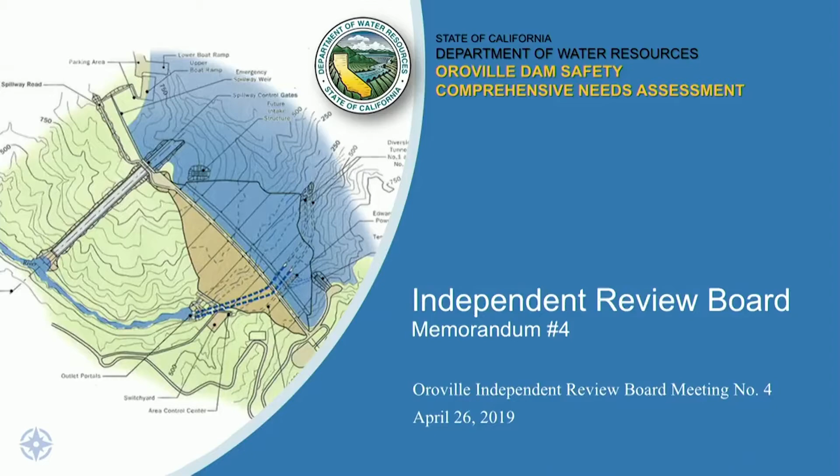Hi, I'm Dan Wade. I'm with the Independent Review Board for the Oroville Dam Safety Comprehensive Needs Assessment, and I'm here to report on meeting number 4, which was held March 14th and 15th of 2019. IRB Memorandum number 4. Just want to remind folks who the Independent Review Board members are for this study. We have Elizabeth or Betty Andrews with Environmental Science Associates, Dr. Lelio Mejia with Geosyntec Consultants, Bruce Muller, formerly with the U.S. Bureau of Reclamation and now an independent consultant, and he's the chair of the board, Paul Schweiger with Gannett Fleming, and myself, Daniel Wade with the San Francisco Public Utilities Commission.

Past Recommendations. So what I'd like to start out with is just to review the status of our comment log from the past 3 meetings. As a reminder, we have status descriptions in the comment log that have been defined to help folks follow the status of each comment that's been made. We have these categories, including under consideration, where the project team is considering the recommendation but hasn't necessarily committed to if or how the recommendation will be addressed. We have a planned status label where the Independent Review Board has accepted the project team's response and an appropriate action is planned, and we know that that's coming.

We have a status label called In Progress where the Independent Review Board does see evidence of the planned actions underway. Then we have a closed status where the Independent Review Board has reviewed and confirmed that the project team's planned action has been completed and adequately addressed. And then we do have a not adopted category where the project team didn't adopt the recommendation and has provided an explanation. And in at least one case, we do have a recommendation that's been superseded. Comment Log. Looking at the last 3 meetings, you can see that in the first meeting there were quite a few recommendations, 22 recommendations, and you can see the status of each recommendation there listed in the column.

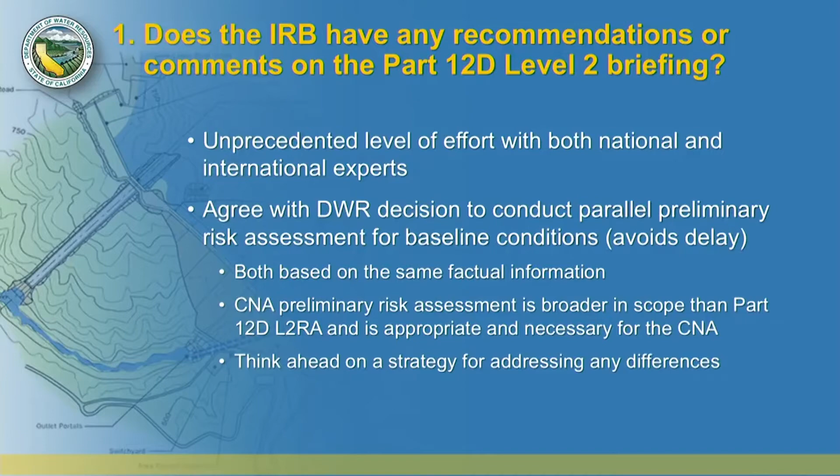We do caution, however, that it's important to think ahead on a strategy for addressing any differences that may be an outcome from doing these parallel analyses, and I'll talk more about that in just a moment. We think the risk is low, and we do feel strongly that the parallel analysis should go forward, but we do want to just strongly urge the team to think about how to address differences if they come along.

And so the second question that was asked by DWR was, does the independent review board have any recommendations or comments on the needs, the objectives, the considerations, and the constraints that were set out in the project from the beginning? And those have been kind of a work in progress, and the IRB was very pleased to see that at this meeting we saw very clear and consistent need statements and project objectives, and we really felt like the team heard our comments from previous meetings and responded very proactively, and the IRB was very pleased to see that. We do see now that there are very clear distinctions between project objectives and project considerations.

And we agree with using the DWR asset management framework as the basis for comparing alternatives. We think that will allow all stakeholders, both internal and external, to be able to view the information and the outcomes of this study in a consistent manner within the asset management framework that DWR has employed.

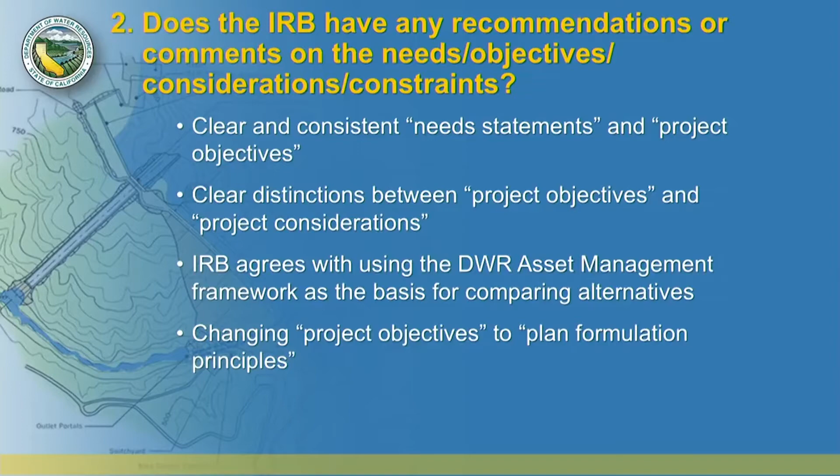We did make a recommendation, and the team has adopted it, to change the term project objectives to plan formulation principles, and that was to really avoid confusion with task objectives as opposed to project objectives. And so there was some terminology discussion in the meeting, and the team has adopted those.

And so the third question from DWR was, does the Independent Review Board have any recommendations or comments on the evaluation criteria and process? And our response to that is essentially that the DWR asset management framework is considered appropriate for evaluating measures and alternatives within the bounds of the comprehensive needs assessment.

We fully recognize that there are other stakeholder issues that need to be considered before final decisions are made on implementation of alternative plans, but that's a decision process that we understand will be employed by DWR leadership after the CNA is complete. And so we fully endorse the framework that's being used for the CNA process and feel that it's very appropriate.

The Independent Review Board confirmed the process for formulating and screening the measures and alternatives. We're very glad to see a robust process presented, and we endorse that process and look forward to seeing the results that come out of it.

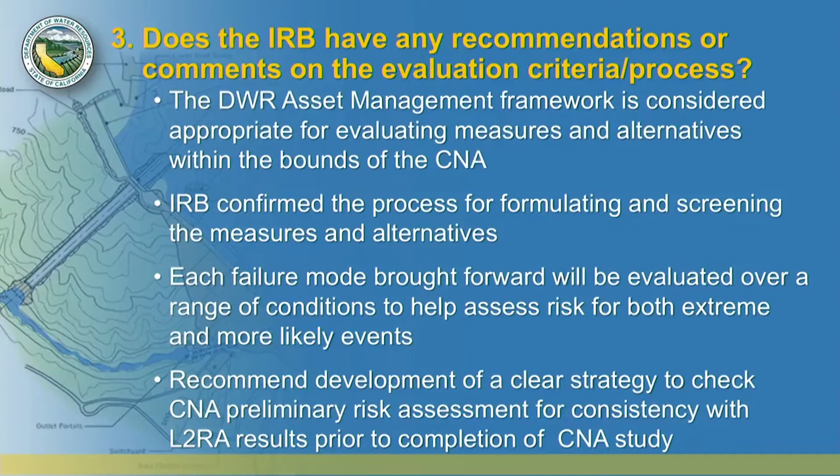And we do recommend development of a clear strategy to check the Comprehensive Needs Assessment Preliminary Risk Assessment for consistency with a Level 2 risk assessment results prior to completion of the Comprehensive Needs Assessment study. And so this is one of our 4 recommendations, that a clear strategy be developed in case there's any differences that need to be reconciled at the end, and how will the CNA be adjusted as appropriate if there's any differences.

The fourth question was, does the Independent Review Board have any recommendations or comments on the Task 4 update? We feel that DWR has appropriately documented a basis for considering the Hyatt power plant to be available for releases if needed for lowering the reservoir.

The task team has made very good and substantial progress in developing the necessary information for the analyses that need to be performed. We were very glad to see the progress that's been made, and we look forward to seeing the progress of the other task teams as well at the future meetings.

The Independent Review Board encourages DWR to begin developing the documentation for the background sections of the report. It's going to be a monumental effort to put all of the task reports together as well as the final report together. And to the extent that task teams can start doing some of the background work now, putting the data together, summarizing sections, and really setting themselves up for success towards the end, we would encourage that to happen.

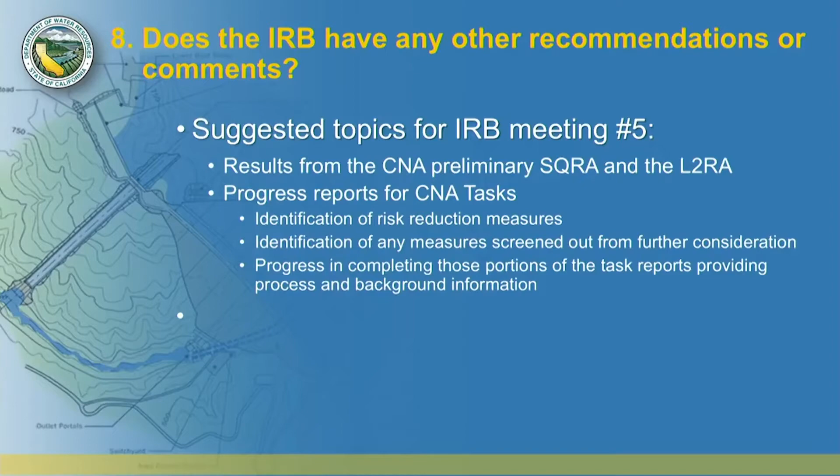And then we look forward to seeing progress draft reports for the various tasks, including identification of risk reduction measures, identification of measures screened out from further consideration, progress in completing those portions of the task reports, providing process and background information. And so, again, the earlier task teams can work on that, I think they'll be setting themselves up for success at the end of the project.

And just as a concluding comment, the IRB was very pleased to see the progress that the team is making, and we feel that the team is well positioned to have a successful project with the work that's been done to date. And so we look forward to seeing the work that's upcoming in August and in the future meetings. Thank you.

Good morning. My name's Les Harder. I'm with HDR Engineering, representing the Department of Water Resources. I'm here today to give you an update on the Level 2 risk analysis that's being conducted for the department on Oroville Dam.

Presentation outline. Generally, the outline I plan to do on the presentation is give you a background on the FERC Part 12D 5-year review process by an independent consultant, introduce you to the thought of a potential failure mode analysis, talk about the Congressional mandate for an independent Level 2 risk analysis, and then give you an overview of the ongoing Level 2 risk analyses that are being conducted. Talk about the organization, leadership, participants, the general approach and methods, and the status and accomplishments to date, and talk a little bit about a revised schedule that we have.

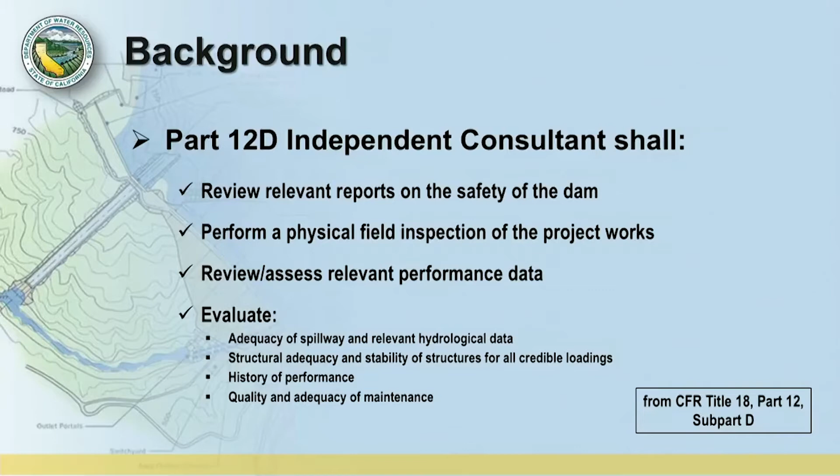So a bit more on background. The Part 12D independent consultant every 5 years shall do these things: review relevant reports on the safety of the dam, perform a physical field inspection of the project works, shall review and assess relevant performance data, and evaluate the following things: the adequacy of spillway and relevant hydrologic data, structural adequacy and stability of structures for all credible loadings, history of performance, and quality and adequacy of maintenance. This is directly out of the Code of Federal Regulations.

The independent consultant shall issue a report, and the report has to have these things. It has to have monitoring information and data, including drawings showing the locations of the instrumentation. Analyses by the independent consultant, analyses of safety of the project works, maintenance and methods of operation, implications of changes in information or analyses since the prior report, adequacy of existing monitoring instruments, periodic observation programs, and other methods of monitoring project works.

The report shall make recommendations, including recommendations on the following: any corrective measures needed for the structures, maintenance, surveillance, or methods of operation, a suggested reasonable time to carry out each of these corrective measures, and any new or additional monitoring instruments, periodic observations, or other methods of monitoring. Again, this is straight out of the Code of Federal Regulations.

So, potential failure mode analyses. This has been required by FERC since December of 2002. It's to be conducted jointly by the owner, the independent consultant, and FERC staff. And a few definitions: a potential failure mode, PFM, is a chain of events leading to unsatisfactory performance of the dam or a portion thereof.

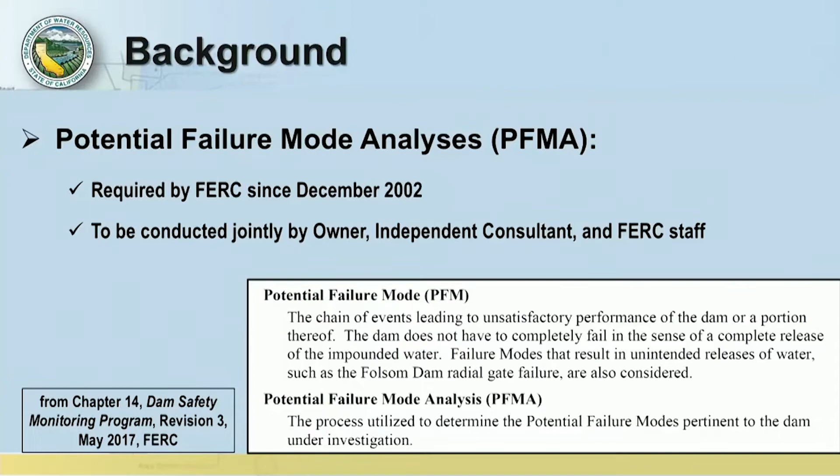The dam does not have to completely fail in the sense of a complete release of the impounded water. Failure modes that result in unintended releases of water, such as the Folsom Dam radial gate failure, are also considered. It's basically a scenario of chain of events that might lead to something that's unacceptable. Potential failure mode analysis, PFMA. This is the process utilized to determine the potential failure modes pertinent to the dam under investigation. And these definitions come from FERC documents, basically Chapter 14.

So potential failure mode analyses, PFMA. The process is as follows. First of all, it's a consideration and development of PFMs. So this is an example of one. This example comes from the Best Practices in Dam and Levee Safety Risk Analysis, published by the United States Bureau of Reclamation and the Army Corps of Engineers. It involves an example of progression of internal erosion within a dam that leads to failure.

So you start with initiation, and part of that initiation is the reservoir is at or above a threshold level. It means it's high. Initiation starts, that means erosion begins. It continues, so under continuation you have an unfiltered or inadequately filtered exit for the water. It progresses, you have a continuous stable roof or sidewalls. More progression, you have a constriction or upstream zone fails to limit the flows through the erosion.

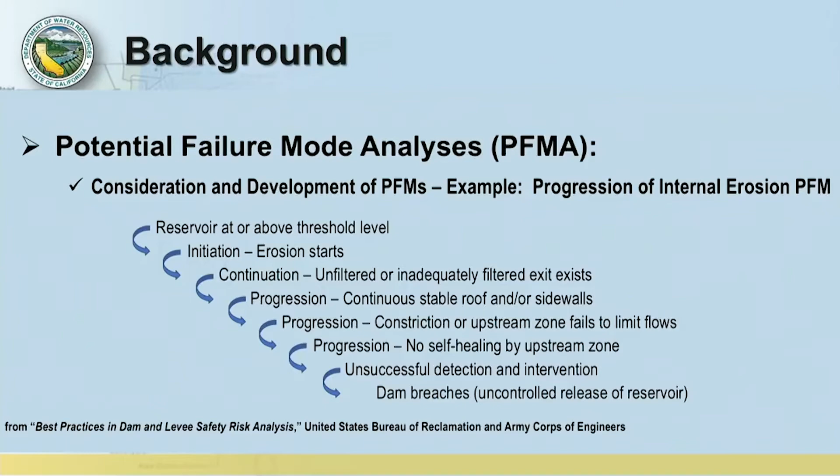More progression, you have no self-healing by upstream zone. And again, toward the end, you have unsuccessful detection and intervention by the parties on site. And finally, this leads to a dam breach and uncontrolled release of water. These are all steps in a scenario that leads to a failure of a dam by internal erosion.

So, along with developing the steps and development of the PFMs, you also identify more likely and less likely factors to affect that PFM. So a more likely factor could be something like the dam is subject to cracking because it has an irregular foundation. A less likely factor could be that the dam was designed to have a good filter in it. It makes it less likely to erode. We have categorization of the PFMs into one of four categories: categories 1, 2, 3, or 4. And this is the standard PFM process outlined by FERC.

The 4 categories are as follows. Category 1 is a highlighted potential failure mode. And these are potential failure modes that are of greatest significance considering the need for awareness, potential for occurrence, magnitude of consequence, and likelihood of adverse response. That's category 1. Category 2 is a potential failure mode considered to be possible, but is not highlighted. These are judged to be of lesser significance and likelihood.

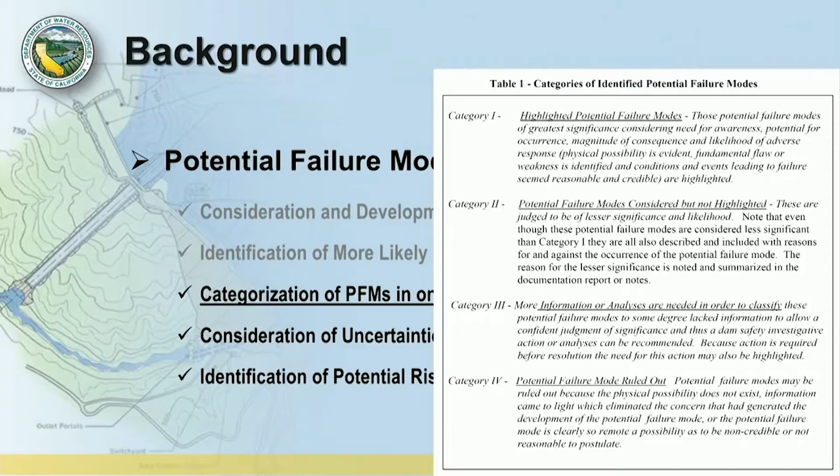Category 3 is basically there's insufficient information to rate or evaluate the PFM, and additional information or analyses are needed. In category 4, the potential failure mode is ruled out because it's believed to be physically impossible to occur. So that's the standard rating in the PFMA process as outlined by FERC guidance. Along with the PFMA development and categorization is the consideration of uncertainties and also identification of potential risk reduction factors. These are the steps in a standard PFMA process that's required every 5 years.

Congressional mandate. Now, last fall, in September 2018, the U.S. Congress had a conference report, and this language was part of that. And this highlighted language in yellow basically says, FERC shall require the licensee of Oroville Dam, that'd be the Department of Water Resources, to request the United States Society on Dams to nominate independent consultants to prepare a Level 2 risk analysis consistent with Commission's guidelines for use in conducting the next Part 12 safety review of Oroville Dam, currently scheduled for 2019. FERC shall ensure the independence of the nominated consultants from the licensee.

So this is a step above the standard PFMA process. So the 2 key things under this language in the legislation is that, first of all, it has to be done by independent consultants. And second of all, it has to be with a Level 2 risk analysis consistent with the Commission's guidelines.

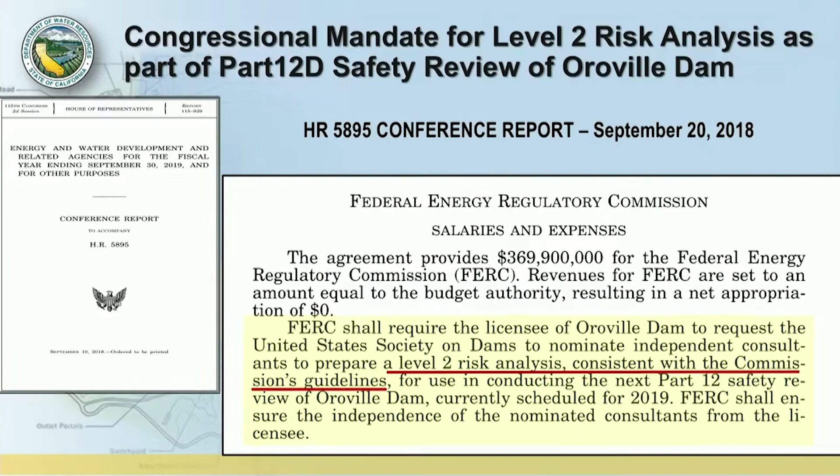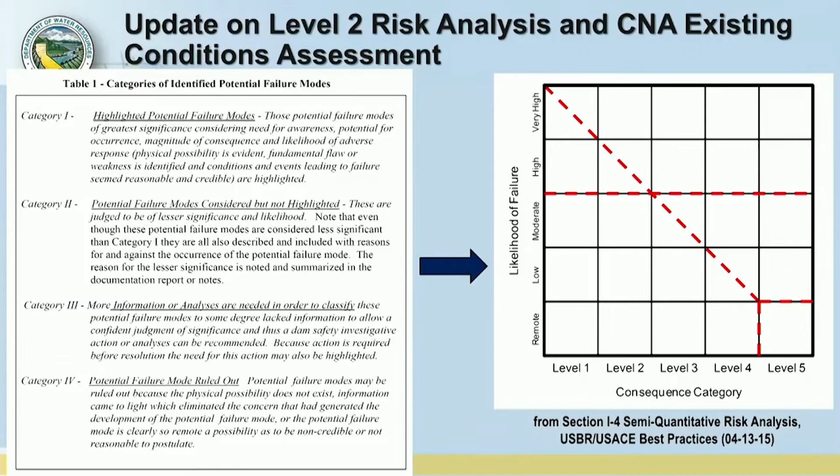Text, overview. So an overview of the ongoing Level 2 risk analysis. Text, FERC summary. FERC defines a Level 2 risk analysis as follows. It's periodic. Its purpose is identification of all PFMs and prioritization of additional studies needed. It is the lowest level of risk analysis for decisions. It does a prioritization of inventory, and it also employs tolerable risk in evaluating existing conditions. The type of risk is mainly incremental life safety, but also economic.

The typical level of effort is low to moderate, led by either a single individual, like an independent consultant, or a small team. The loadings are basic tools and methods to estimate annual exceedance probability. The consequences are estimated by simplified methods, the system response covers common PFMs using simplified approaches, and the uncertainties are evaluated on a qualitative basis.

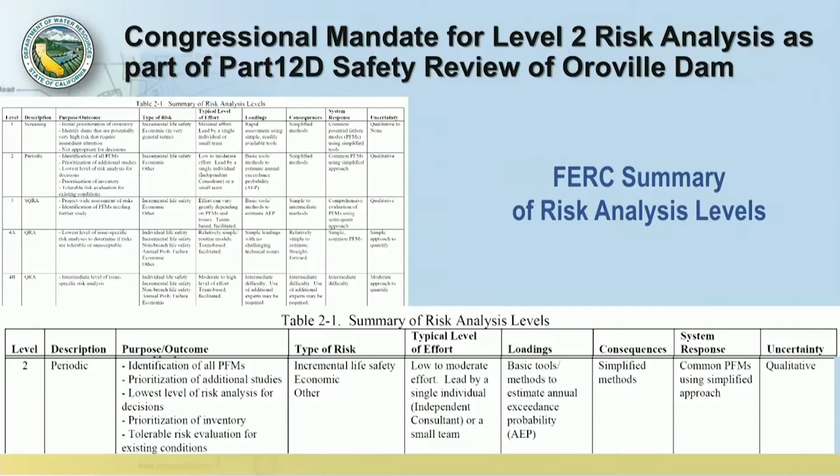Text, FERC draft. The guidance we're using is the best available from FERC. This is their guidance for a Level 2 risk analysis. It's still in draft form. This is the second draft, version 1.1, published in June 2018, and this is what the team is using to carry out the risk analyses.

Text, purposes and benefits. Purposes and benefits of a Level 2 risk analysis. Purposes include, first of all, it satisfies the congressional requirements for an independent Level 2 risk analysis. It also informs the FERC Part 12D periodic dam safety process, going beyond traditional PFMAs and category selection. Remember, the independent consultant still has to make their report, and they have to incorporate these results in it.

Benefits include, first of all, it's an organizational learning opportunity for a lot of people. This is the first type of analysis that FERC has applied nationwide, and it'd be a great learning opportunity for all participants, including DWR. It will inform the DWR Comprehensive Needs Assessment and the Asset Management Program. It is a demonstration of a Level 2 risk analysis on a major facility. And implementation of the independent forensic team's recommendation to expand the definition of failure, which is important.

Organization, leadership, and participants. First of all, the risk analysis team leads were nominated by USSD and hired through HDR's engineering contract with the Department of Water Resources. The independent team participants include experts from over 9 different consulting firms and agencies that include Black & Veatch, Gannett Fleming, Geosyntec, HDR, LCI, Schnabel. It also includes the U.S. Corps of Engineers Risk Management Center personnel, and we reached all the way across to Australia to the University of New South Wales. That's the independent team.

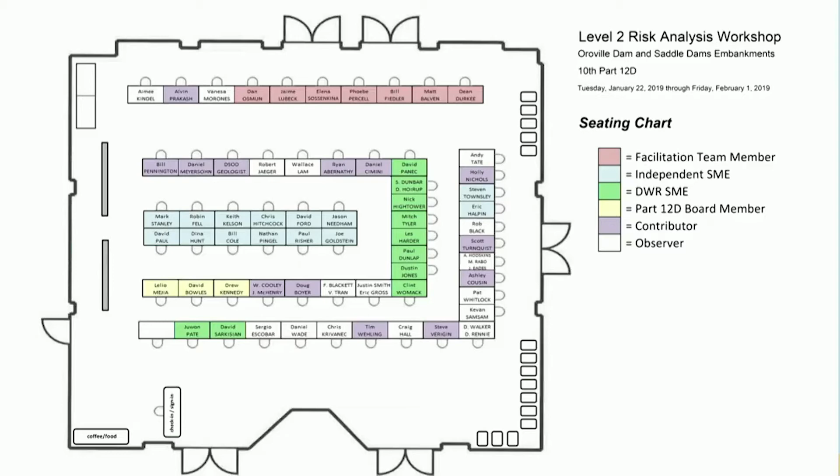The seating arrangement is generally to have the independent evaluators in the middle. That's the light blue boxes in the middle there, surrounded by DWR subject matter experts and other contributors. And then in the outer ring of seats, there are facilitation team members, observers, and other contributors. We meet either in HDR's office or in hotel conference rooms. Again, there's over 60 people here. It's costing DWR over $100,000 a day to do this, and there are a lot of days.

The process follows, again, the Level 2 guidance by FERC to take the existing information and develop an estimate of likelihood and consequences. The types of failures and consequences are divided into 4 groups, groups A, B, C, and D. The first thing is to think, does the event occur? Does the component fail? So if it fails, is there life loss? If there's life loss, that's group A. If the component fails, and again, the component could be a radial gate or part of the embankment, but there's no life loss, that's group B.

And then there are consequences even if everything works perfectly. For instance, in a very huge flood event, the reservoir in the dam will attenuate or reduce the flows discharged to the Feather River, but it doesn't stop them. And under some conditions, you still get flows that are overwhelming to downstream levees, even though the system works perfectly at Oroville, perfectly as intended, no component failure. In that case, you can still get life loss, that would be group C, or if there's other non-life loss consequences, that would be group D.

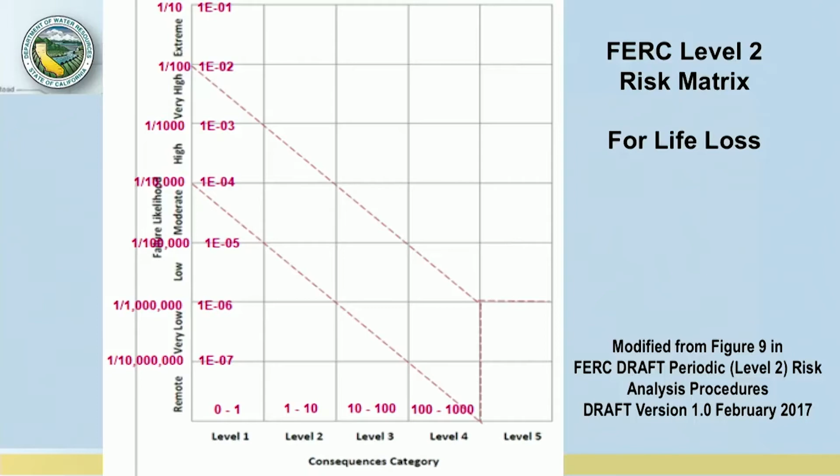The type of semi-quantitative risk matrix, this is an example from the FERC guidance document that has different levels of consequences. In this case, what's in red is potential life loss. So in level 1, it's 0 to 1. Level 2 is 1 to 10 lives lost, and so on. Level 3, level 4 is 100 to 1,000. And then on the vertical axis is the likelihood, the annual likelihood that that could occur. And 10 to the minus 7 there is 1 in 10 million.

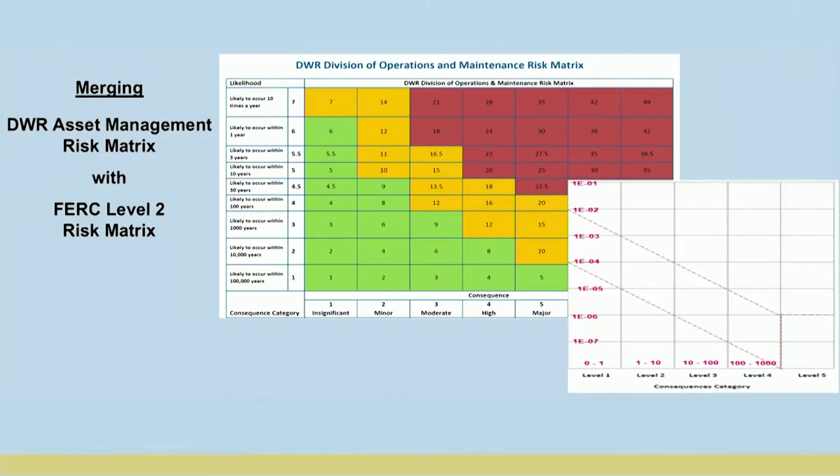The DWR's asset management risk matrix, that's the color-coded one in green, yellow, and red here. And that was developed generally for smaller components on the State Water Project. But for Oroville, the highest dam in the United States, we've had to extend the matrix just because the potential consequences are much greater than a typical component in the State Water Project. And so this is the risk matrix that is being used for level 2 for Oroville. It starts with a potential life loss from 0 all the way up to greater than 10,000 and considers likelihoods all from 1 in 100 annual probability to 1 in 10 million.

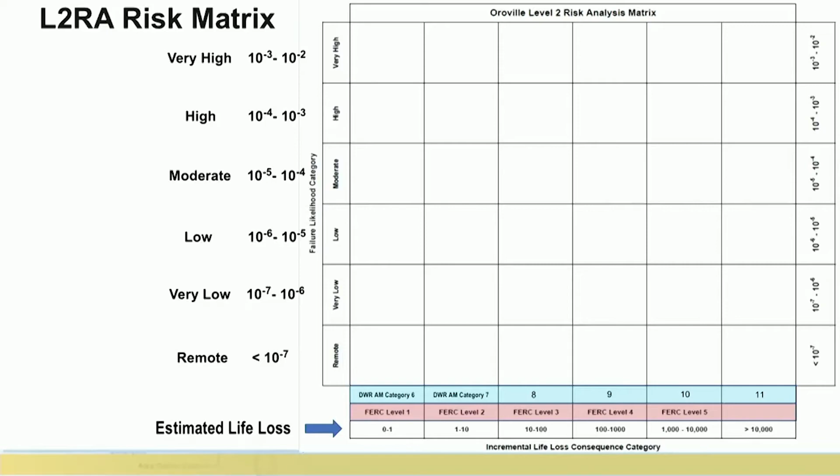Potential failure modes. Prior to the workshop, potential failure modes identified in previous PFMA workshops from 2009 to 2014 were combined and put in a table, and then the participants prior to the workshops were asked to brainstorm new potential failure modes. And these were all combined into a matrix identifying 171 pre-workshop potential failure modes that were considered.

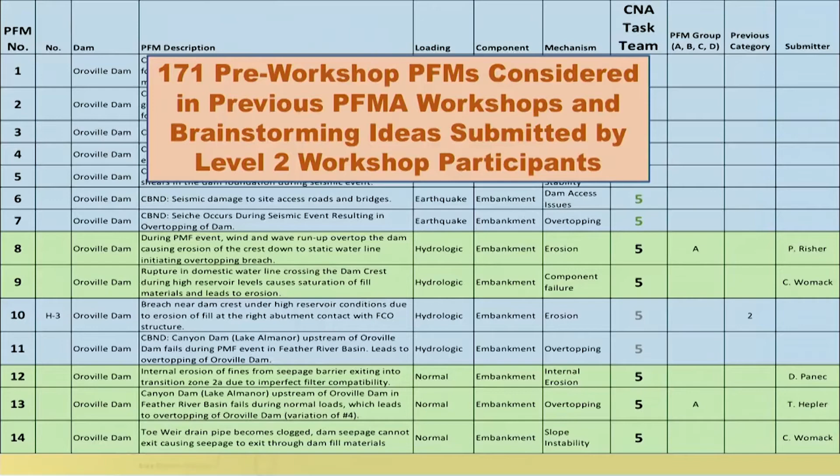These break down as 35 of them are associated with the embankments, 19 are associated with the emergency spillway, 64 are associated with the flood control outlet, the headworks, and the chute, and 53 are associated with the existing outlets. That's the Hyatt Power Plant, the Palermo Tunnel outlet, and the River Valve outlet. 171 total.

Some of these PFMs were previously considered but not developed because they were not thought to lead to a breach or uncontrolled release. We're now looking at other consequences, so many of these are being developed now. And then during the workshop sessions, additional PFMs are developed and added to this matrix.

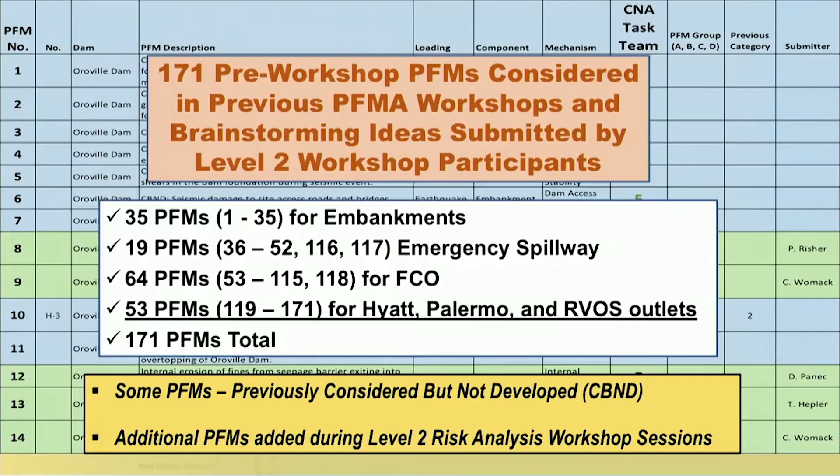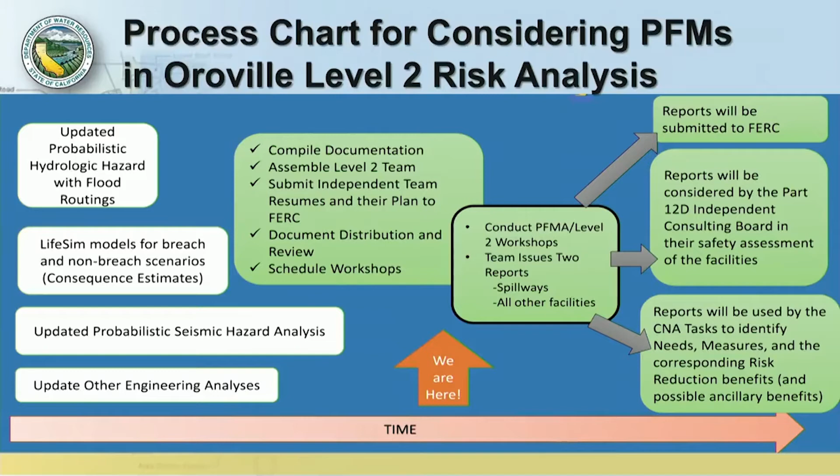Next, process chart. The basic process in the workshops is to present the available information relevant for the potential failure modes, do the steps in developing the potential failure modes, looking at likely and less likely factors, uncertainties, and then estimating the likelihood and the consequences. These will all go into reports that will be submitted to DWR and FERC later this year.

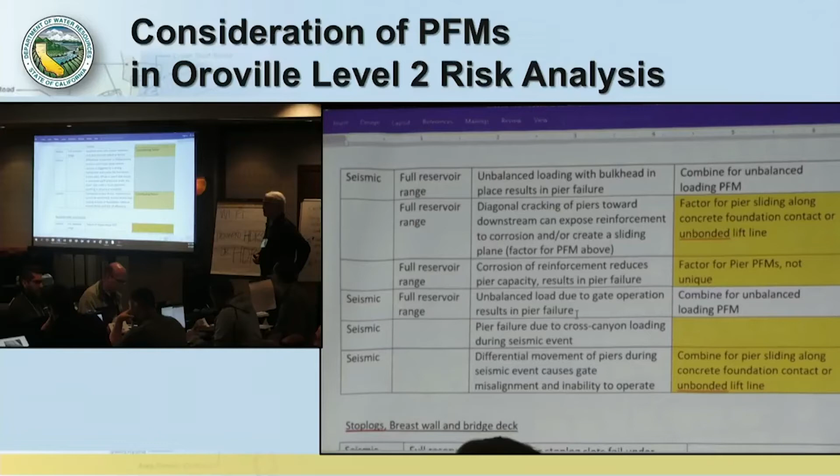Just a few snapshots here. This is during one of the workshops involving the flood control outlet headworks, and these were looking at seismic issues. These are different potential failure modes being discussed involving different components of the FCO. This is the beginning of developing the steps in a potential failure mode. Remember the sequential initiation, continuation, progression.

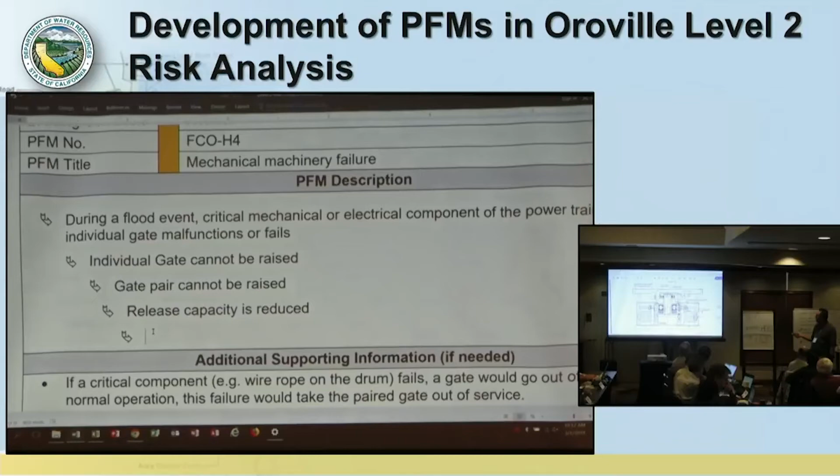This particular one has to do with a potential failure of the mechanical system that lifts the gates. And during this process, the components are reviewed in detail. In the lower photograph there, you can barely see an outline of part of the hoisting mechanism. And the likelihoods are then estimated and the consequences are done using guidance from the FERC.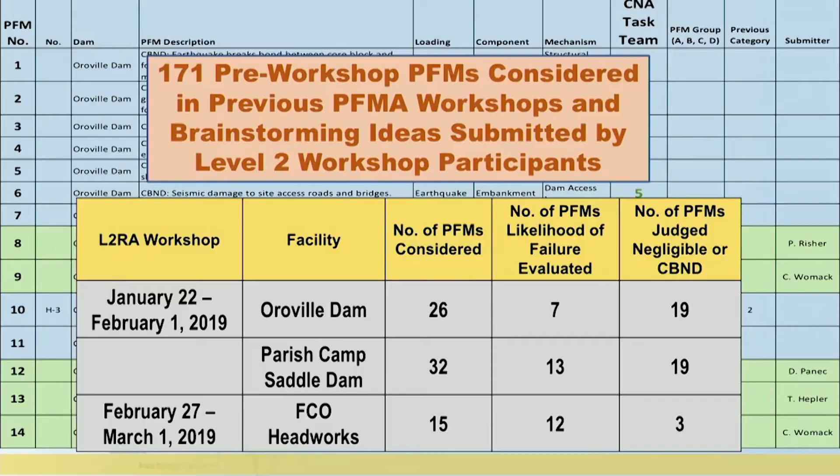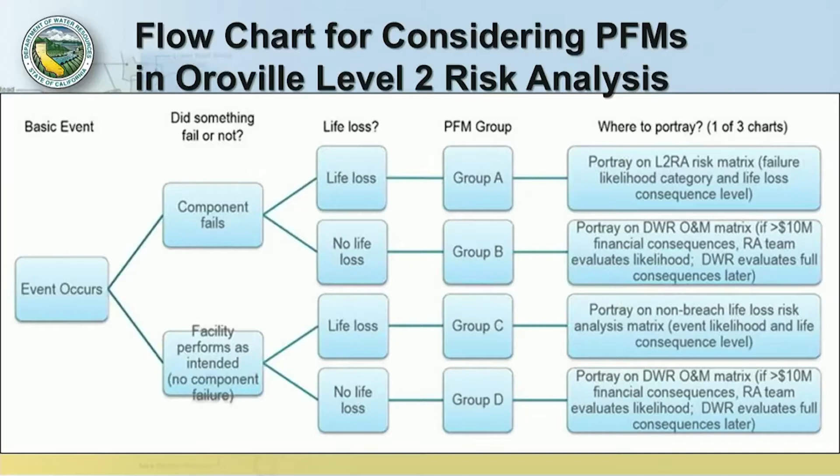And so far, we've done a lot of PFMs. Many of them were evaluated. Some were judged to be negligible and they were considered but not developed. So there's quite a few here just shown for the embankments and the FCO headworks. Again, so far we've concentrated on the potential for life loss, which is Group A. And in subsequent sessions, we'll be also looking at Group B, non-life loss consequences.

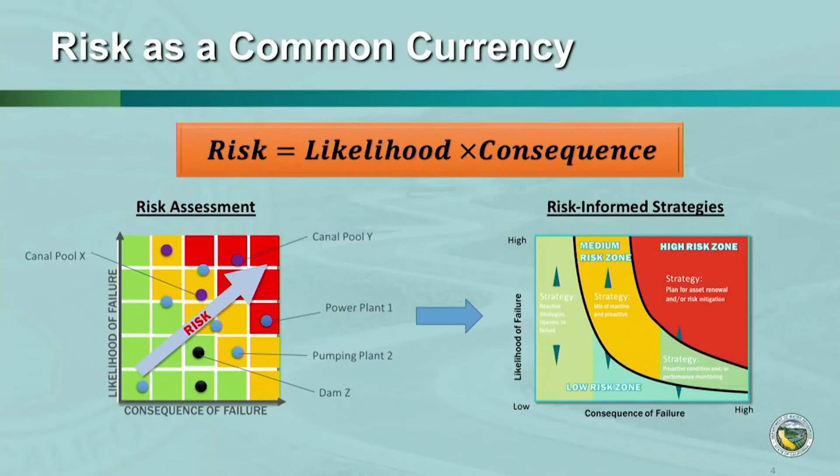And the other thing that you're able to then leverage from this type of an evaluation by driving that consistency across those different asset types is you're able to then select different risk-informed strategies based on where these dots land on the chart. Recognizing that how you might treat an issue that's a low likelihood, high consequence is very different than you would treat an issue like a light bulb that may fail and burn out, that may be high likelihood but very low consequence. Able to pick different risk strategies.

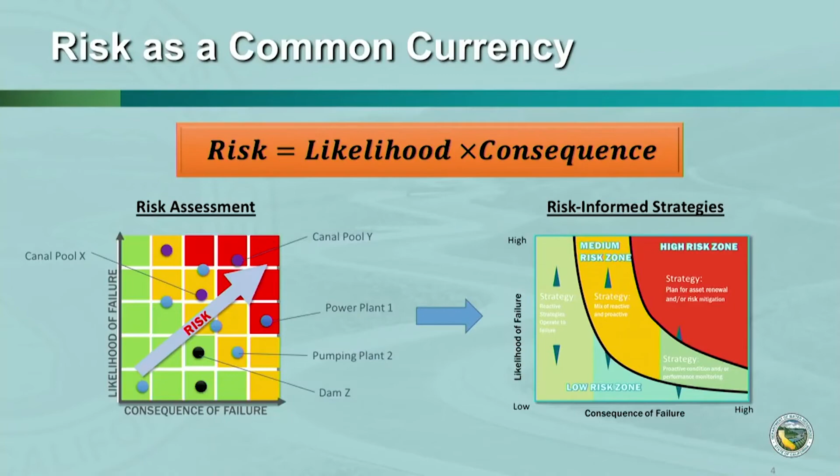Obviously, if you move to the upper right of that screen, you'll see your high likelihood, high consequence. That's where you're probably going to be looking for risk mitigation opportunities to reduce the risk. Where you get to very low likelihood but still high consequence, you may not be able to find an engineering solution to reduce that risk, but there are a lot of strategies that you can employ for proactive condition monitoring and performance monitoring to make sure that you can detect issues as they develop before they become a real problem. And that can be just as effective, if not more effective, than attempting to mitigate the risk.

So the risk framework that we've deployed, again, is really focused on trying to drive consistency across the business processes or business areas. We've based this on the ISO 31000 risk management standard. Our framework provides processes for risk identification, risk assessment, and selection of treatment options. It's also through the consistency we're able to evaluate risks at an asset or equipment level, aggregate them up to the facility and portfolio levels, and then inform our enterprise risk processes too.

And where that becomes important is in the framework, it's not just about doing analyses and analyzing the risks. It's also setting up a framework to communicate those risk results to the appropriate levels internally, where low likelihood, low consequence items are generally held and managed at the program level. As you move into the higher severity, higher likelihood, or higher risk areas, we have approaches to escalate the communication of those risks to division management, executive, and the appropriate external stakeholders.

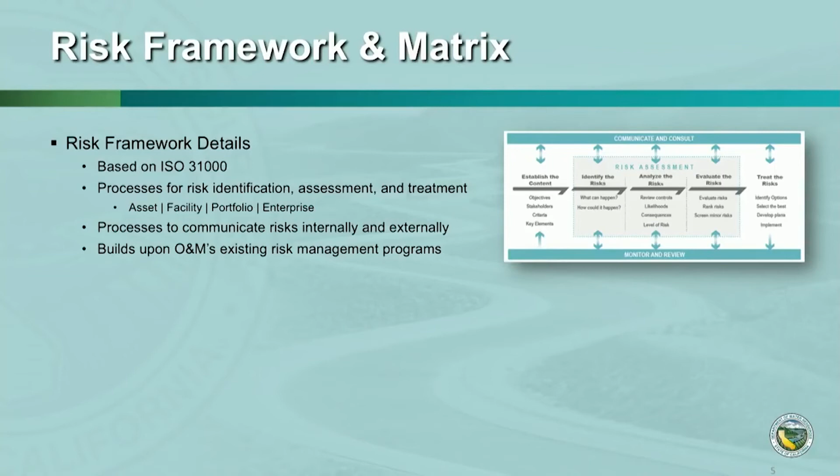Another key facet is this risk framework builds upon a lot of risk management processes that were already in place across various O&M programs. A key tool then is the risk matrix, which I understand the ad hoc group has probably seen in the past. It's a 7x7 matrix, scoring based, likelihood on the vertical scale, increasing severity of consequence on the horizontal scale.

For our AM processes, we score our issues across 7 different consequence criteria that are based on the SWP strategic plan. They focus on personnel and public safety, impacts to the mission, be it water supply, power generation, recreation, fish and wildlife enhancement, flood control, as well as financial impacts. This is really the tool that we build upon for a number of different processes, from more detailed risk assessments, like you'll see in the next presentation for the comprehensive needs assessment. It's also being incorporated into parts of the Oroville Level 2 risk assessment.

And by adaptability, that means giving the different program areas the ability to fine-tune the resolution between the criteria and expand the range as necessary to capture and differentiate the risks that they're looking at that may not fit this 7x7 grid perfectly. But the real benefit of this risk framework is again driving that consistency across programs. So where we're evaluating things in a similar manner, we can compare likelihoods and consequences and risks across the dams, the civil features, the electrical and mechanical systems. And as I think you'll see on the next presentation, it's a building block for the comprehensive needs assessment risk activities.

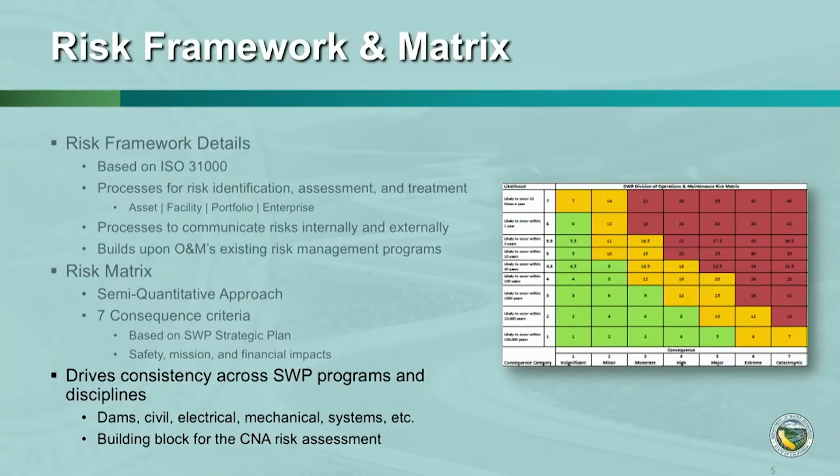The other relevant risk-informed process that the ad hoc group is interested in is when we do these risk assessments, we come up with issues that turn into proposed projects. We do have a risk-informed project planning and prioritization process that we incorporate into our near-term and longer-term planning cycles. And these planning tools incorporate three key inputs: the proposed cost of the project, the risk addressed by the project, and the internal resources required to perform the project.

And for DWR, like many organizations, it's typically the internal resources that are the primary constraint on being able to either perform the work internally or manage the work that's contracted out. So the resources generally become the greatest constraint that we try to balance through our prioritization process.

We rely heavily then on our risk assessments to essentially assign a value to the project, with the prioritization process allowing us to identify those projects that reduce the greatest amount of risk in the least amount of time within the resource constraints that we have.

Outputs of these planning processes then is a fully resource-loaded, risk-informed 2-year budget that we operate off of and update every year, as well as a risk-informed 5-year capital plan for these large capital programs that O&M manages. And when I say risk-informed, not every project is fully resource-loaded, so it's not fully optimized out to 5 years, but it gives a very clear picture of the types of major projects that we have down the road.

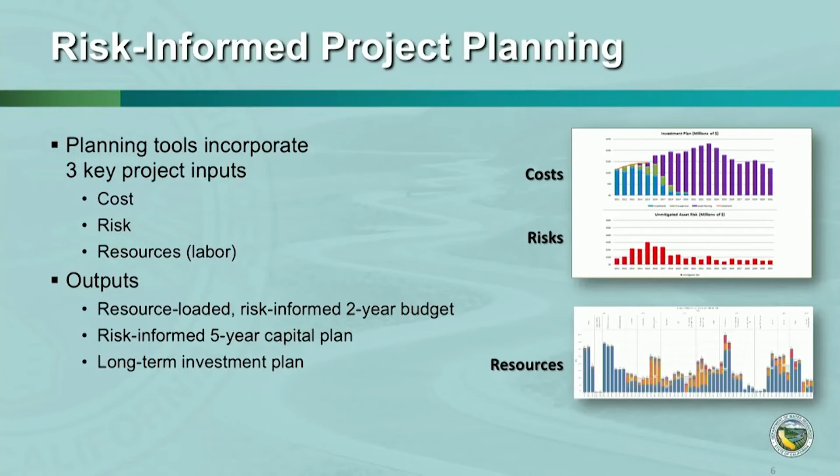So with that, I'd like to thank you for your time in this presentation, and I believe Dr. Ford will, in his presentation, show how the CNA is adapting that risk framework to develop the detailed risk assessments for their program and how that will feed back into our planning process.

Evaluation is really a key component of the Comprehensive Needs Assessment, particularly evaluation of the existing risk at Oroville and the risk reduction that will be achievable by the measures and plans that are put forward by the Comprehensive Needs Assessment. My name is David Ford. I'm from HDR. I'm a member of the Comprehensive Needs Assessment Integration Team, and I'm going to explain to you today the progress we've made on this evaluation step in the Comprehensive Needs Assessment. And also I'm going to remind you a little bit about what that process was.

Here's a comment from the Independent Review Board in the last meeting. The IRB noted that they were pleased that the team had turned to DWR's asset management framework for assessing risk and for evaluating plans and measures in the Comprehensive Needs Assessment. They said that adapting this approach will be readily understood within DWR and has already had the benefit of considerable thinking and vetting through application, in addition to the other supporting reasons cited by the team.

The IRB recommended that we develop the evaluation framework in the near term to include additional consequence or outcome categories, including beneficial project outcomes. I'm going to explain to you and give you a little detail of how we've taken this advice from the IRB to heart and moved forward with it.

Here's a summary of our progress since our last meeting. First, we devised an alternative strategy to analyze risks for existing conditions. My colleague Les Harder mentioned that a little bit earlier when he talked about the level 2 risk analysis and how that had been extended to account for consequences that were beyond what had been considered by the asset management framework, and also likelihoods or probabilities that were beyond what had been considered. I'll talk about that a little more in a minute.

The second thing that we've done in the Comprehensive Needs Assessment is to develop a workflow for our semi-quantitative risk analysis. And in these slides I've used this acronym SQRA a few times to represent that. The third thing that we've done that I'll report on is initiated the SQRA at the comprehensive needs analysis task level. That's become an important component. It relates to what my colleague Les Harder was talking about earlier with the level 2 risk analysis. I'll tell you what we've done and also explain to you why we've taken this strategy for the CNA.

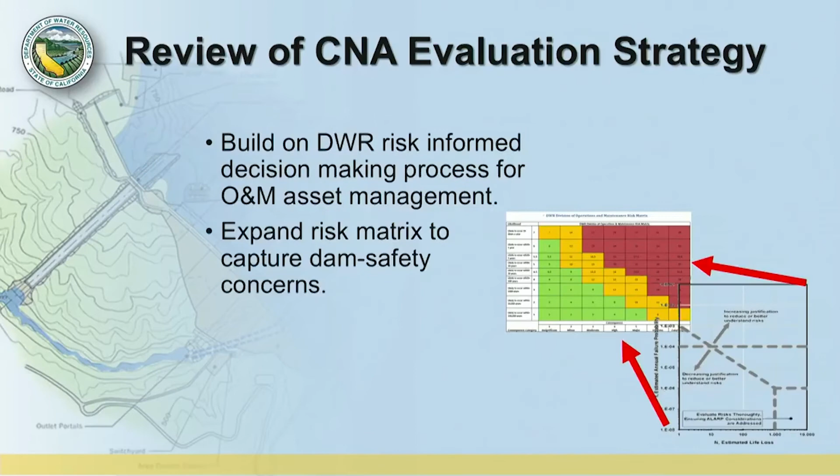Les Harder mentioned in an earlier presentation that as a part of the level 2 risk analysis, but also as a part of the comprehensive needs analysis, we've extended or expanded this asset management risk framework matrix. In part, that's because we want to consider failure modes that have a lower probability of occurrence, but we also want to consider failure modes that potentially have an impact that's greater than what had been considered originally in the asset management matrix. And so this cartoon on the right shows, as Les mentioned, that we've extended that downward and to the right.

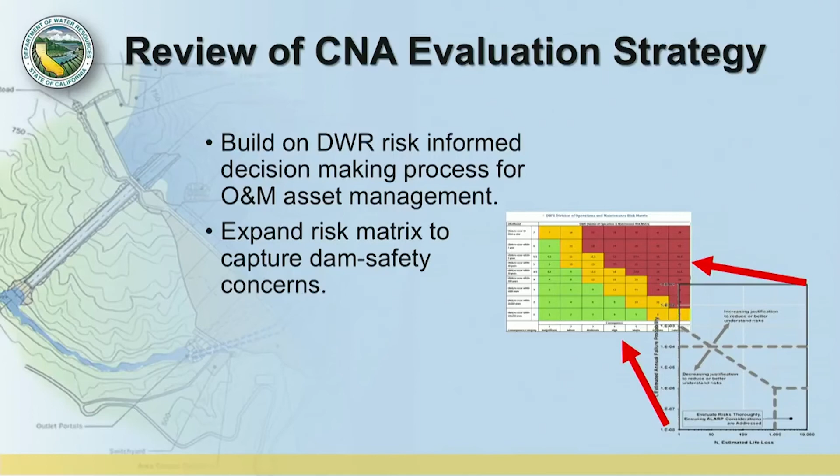The next thing that we do in the comprehensive needs analysis evaluation strategy is use that risk analysis framework from the asset management within this process that's illustrated by the figure on the right here. This process is the FERC FEMA process for dam safety risk analysis and risk management.

And as you see, moving from the lower left to the upper right, it starts with a potential failure mode analysis, identification of those failure modes, and assessment of their likelihood, moving on then to risk assessment and use of that kind of information in terms of assessing risk of existing structures, but also in our case for the comprehensive needs analysis, using that failure mode analysis and the corresponding risk analysis to assess measures and alternatives that will be formulated as a part of the CNA planning process. I'll come back and talk about that a little bit because that's really an important consideration and an important piece of information about the progress we've made.

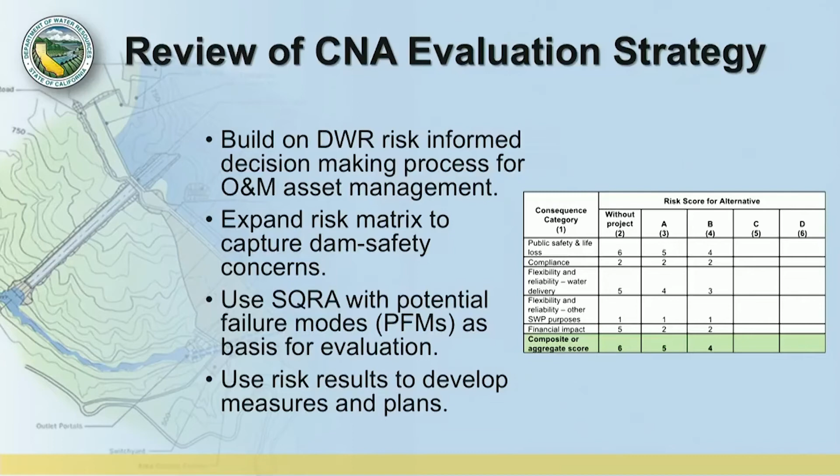Let me return then to some discussion of the potential failure modes, because that is critical and central to our evaluation strategy. You saw earlier in a presentation by Les Harder a description of what a potential failure mode is. Here's FERC's definition of a failure mode. They say it's a specific chain of events that lead to a dam failure. And FERC defines a dam failure as an uncontrolled release of water.

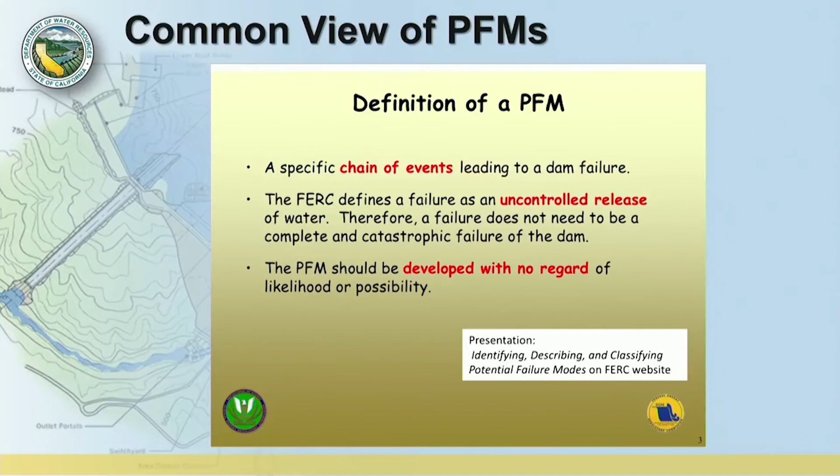And so as we move through understanding the potential failure modes, the risk associated with them, that is the probability and the consequence, we're considering not just, for example, maximum loadings like the probable maximum flood or the maximum credible earthquake, but we're considering lesser loadings too, so that we can identify what the critical loading is on this system, and we can focus our efforts on remediating or mitigating the impacts that would come as a consequence of the occurrence of that event. We're not looking just at the biggest event.

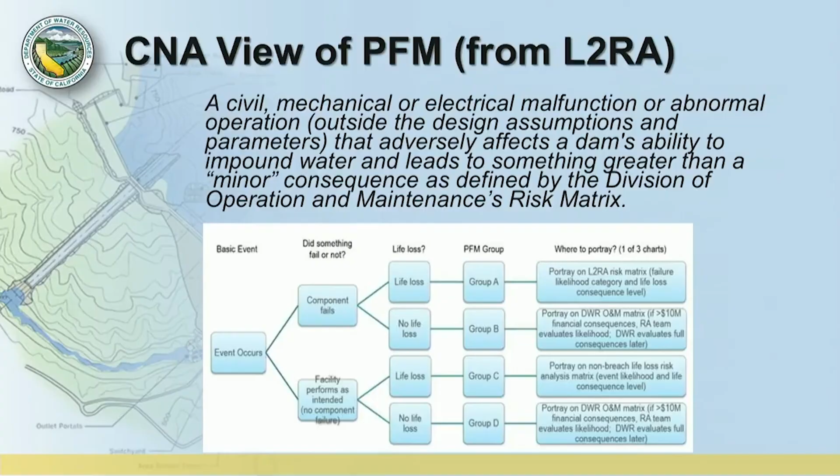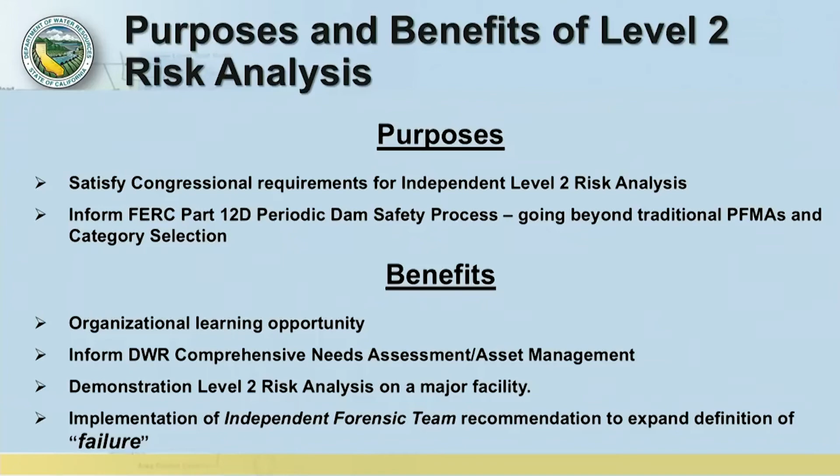I'll remind you with this slide of what the purposes and benefits of that Level 2 risk analysis were. You heard much of this earlier from Les Harder, but the key purpose was to satisfy congressional requirements and to inform the FERC Part 12D periodic dam safety process. So this Level 2 risk analysis was not being conducted specifically for the CNA. Instead, it was conducted as a part of the department's normal process of dam safety evaluation.

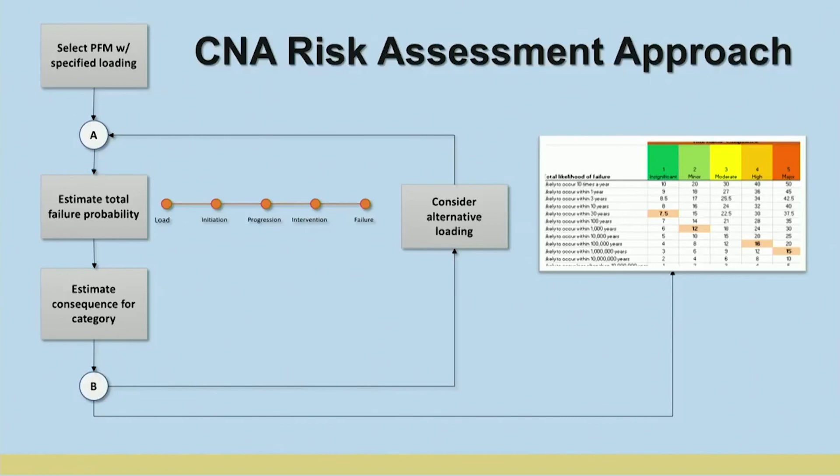And I have a few slides here that will illustrate how that's being used by the comprehensive needs assessment teams as they move through these potential failure modes, have a conversation about likelihood, consider the consequences that would result as an outcome from that failure mode. So first, this application, which all the teams have access to, has a typical Windows interface in which the teams provide text to describe the scenario that they're considering. So in this example, here's a potential failure of the emergency spillway monoliths due to head cutting through the RCC apron that's been placed during the recovery.

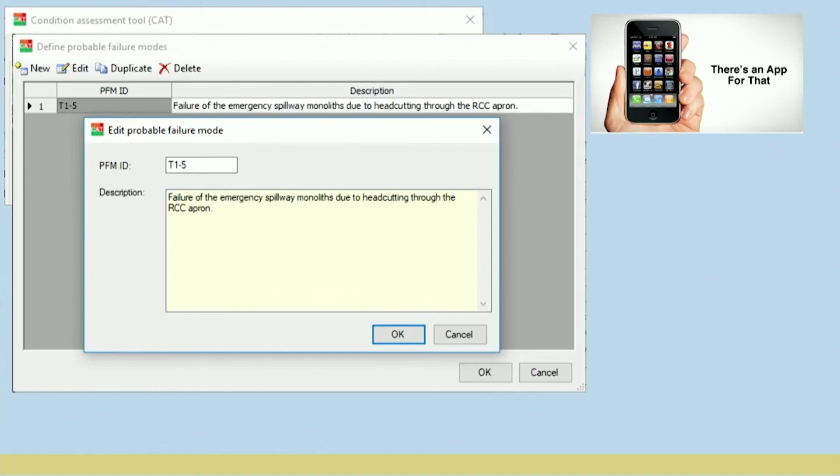The teams then walk through a set of dialogues that ask them to further describe that failure mode, to give information that comes forth from the subject matter experts on that team so that there's a record of their deliberations about likelihoods and potential consequences of this failure mode. The teams will also assess the likelihood and record that in terms of ranges of probability consistent with the Level 2 risk analysis and also consistent with the analysis that's done as part of the asset management program by DWR Operation and Maintenance.

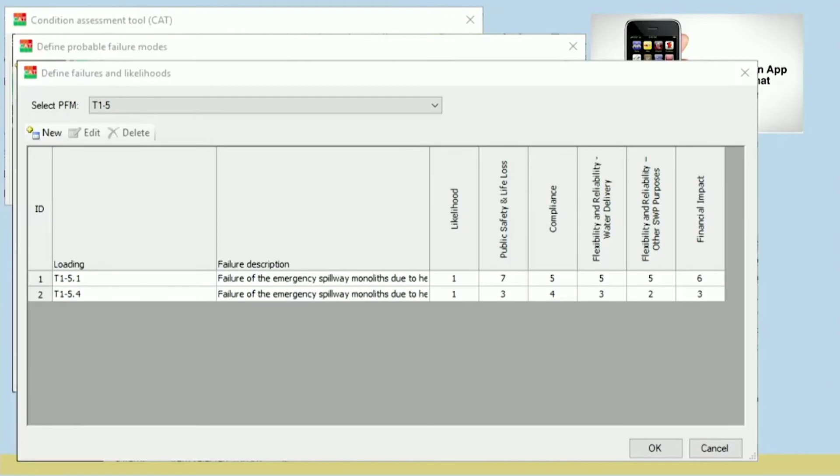So in addition to the probability of the hydrologic or seismic load, they can here record their assessment of the probability of initiation of the failure mode, their probability estimate of the progression of that failure mode, their assessment of the probability of some successful intervention to prohibit the failure, and their assessment finally of the probability of the failure.

As another step in this process then, the teams will identify the consequences. And the consequence identification uses the categories directly from the asset management risk framework, with categories defined and subcategories or choices within the categories defined through the work that the asset management group in operations and maintenance has accomplished here. So the comprehensive needs assessment team's process of identifying consequences is identical to that used by asset management.

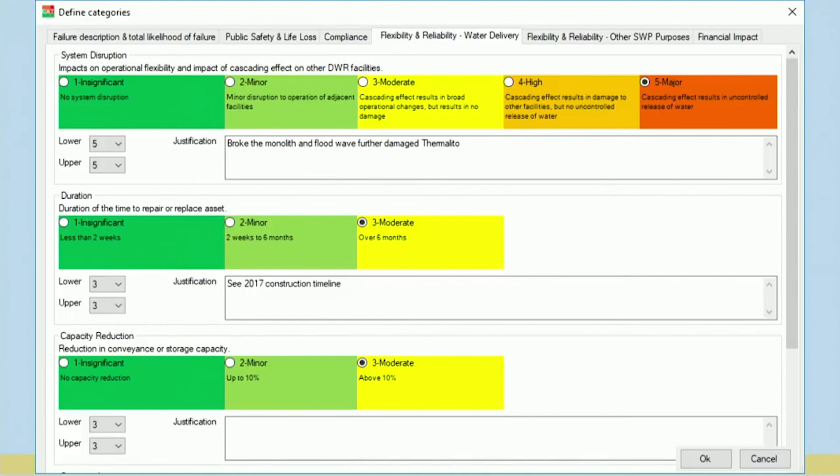This goes through the entire set of consequence categories that asset management has identified. The first you saw was public safety and life loss. Here's a piece of the interface where the teams will identify their assessment of the consequence in terms of compliance. Here's reliability and flexibility of water delivery. Here's flexibility and reliability of other state water project purposes. That includes flood control, power generation, recreation, and other subcategories that are below this on the interface.

And then we ask the teams, based on information available to them, to assess for each potential failure mode and each combination of loading in that potential failure mode, the financial impact. And so this is the financial impact to both the department, but also to others who are influenced by the outcome that would result from a failure, loosely defined here, not just maximum loading, but other loadings.

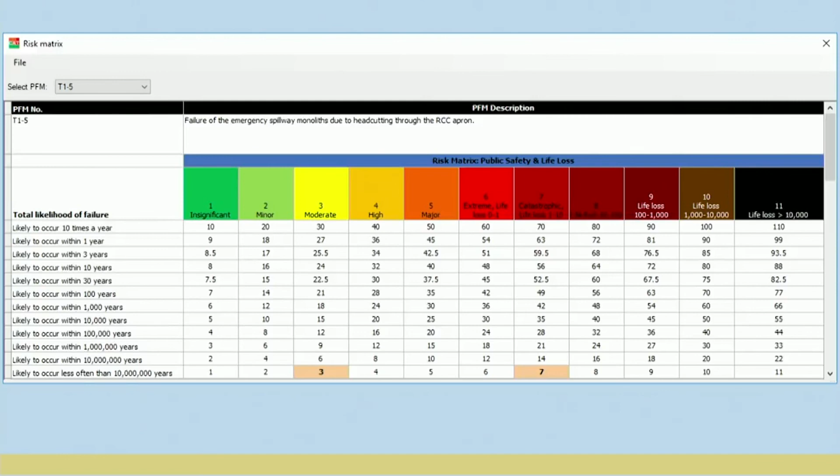Once the teams have completed the process of stepping through the potential failure mode and considering likelihoods and probabilities, then a diagram like this is produced that allows us to inspect the results for that potential failure mode, and then the team can circle on to other potential failure modes. Reports are available. These reports provide summaries of failure modes, loadings, and the consequence categories, both maximum and minimum and average categories that were identified through the CNA task team's analyses.

Various summaries can be produced from this that enable the integration team then to quickly identify what the critical loadings were and to allow us with the task teams to focus on measures that are most likely to be fruitful in terms of risk reduction in all the categories that we've identified and talked about in earlier slides.

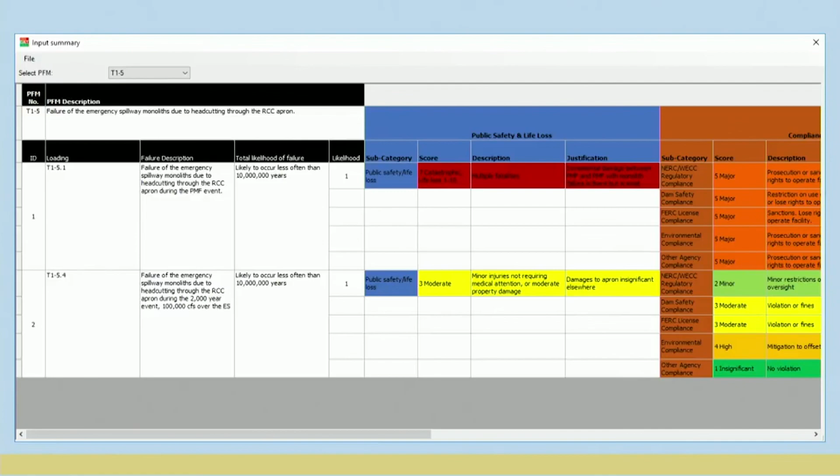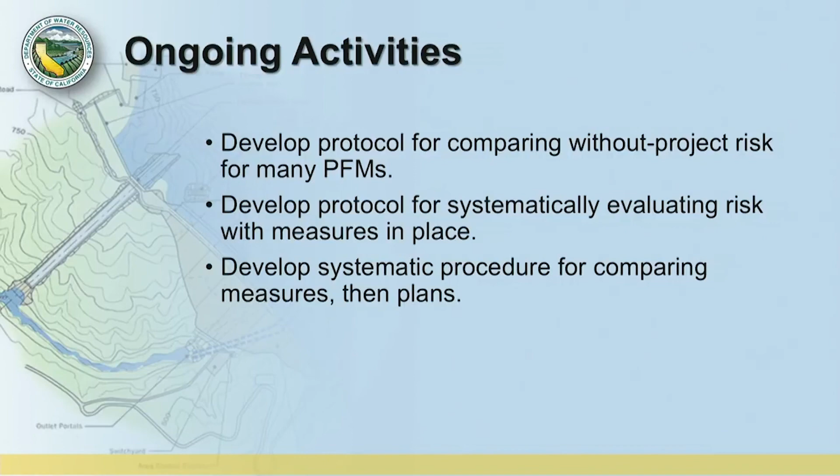And then the third step related to that is to develop a systematic procedure for comparing first plans that we might take or measures that we might formulate, for example, to reduce the risk associated with the Hyatt power plant, and then to evaluate plans that would be formulated when we combine the Hyatt power plant measures, for example, with measures that will reduce risk associated with use of the spillways. Thank you.